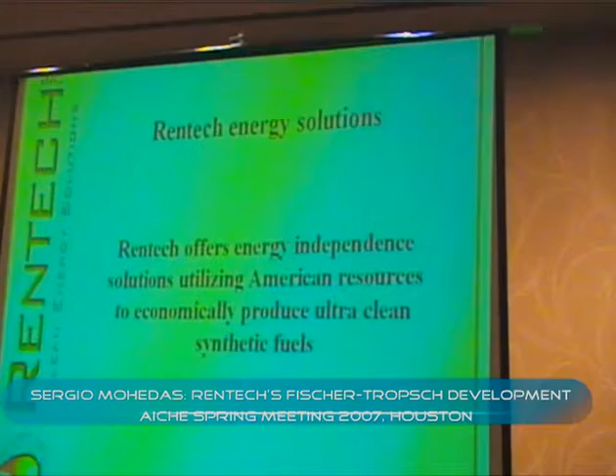Let's start talking about what is the Rentech role in this current energy situation. With sustained high oil prices and somewhat unstable supply, people are rapidly looking at different feedstocks, especially those that are widely available. Coal is one of them here in North America especially. So Rentech's business model is focused on converting coal into liquid fuels, and we will be working with other carbon-bearing material in the near future, like biomass as well. But right now we are focused on coal.

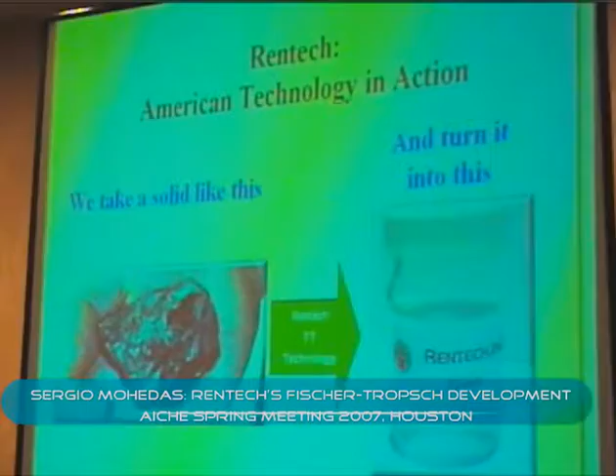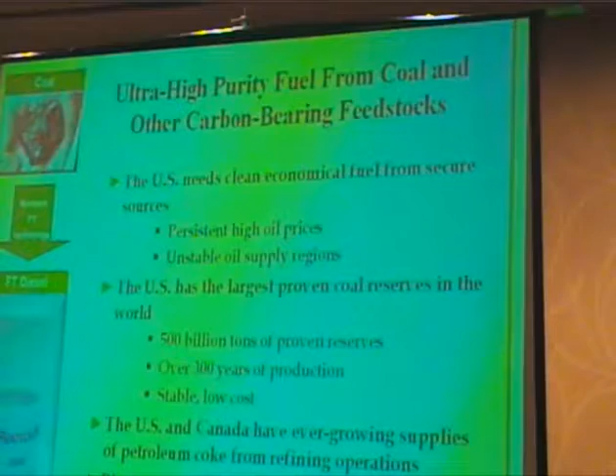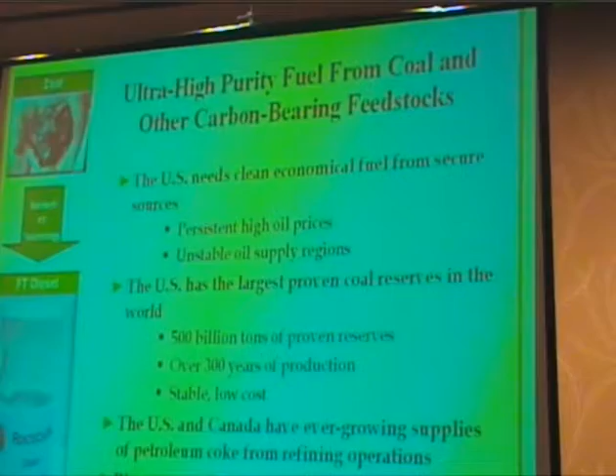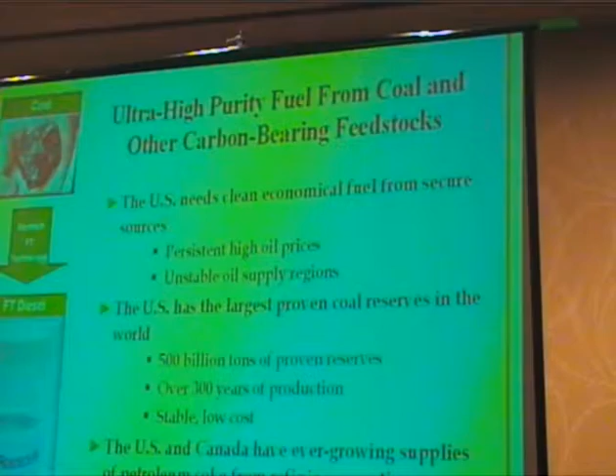Basically, it's taking an ugly rock like that and converting it into a pretty liquid like the one in the picture. It sounds simple, but it has some tricks, especially if you want to be economically competitive. The need for fuels is obvious, and basically the oil price is driving research on different feedstocks that are more available and cheaper than oil. That's why coal is one of them, especially in North America. We have one of the largest reserves of coal in the world - a few hundred years of production can be sustained with our reserves. So it makes sense to try to use it.

Biomass could be another feedstock that can be converted into liquid fuels, and we will be looking at that too.

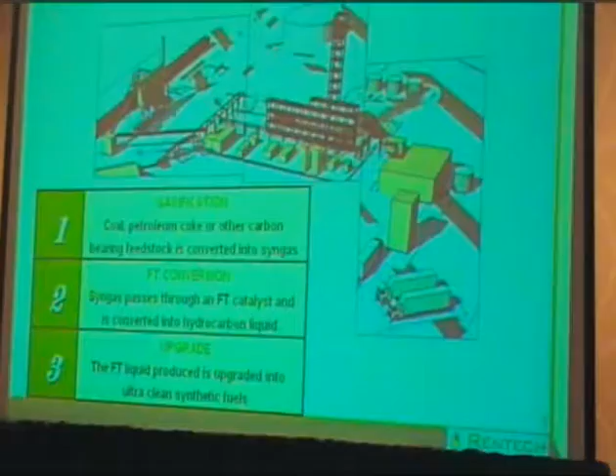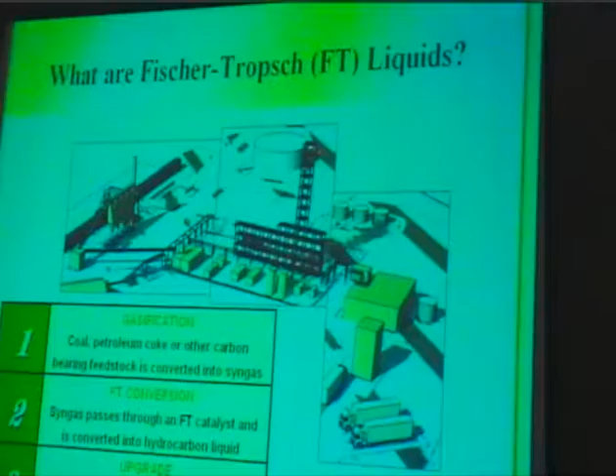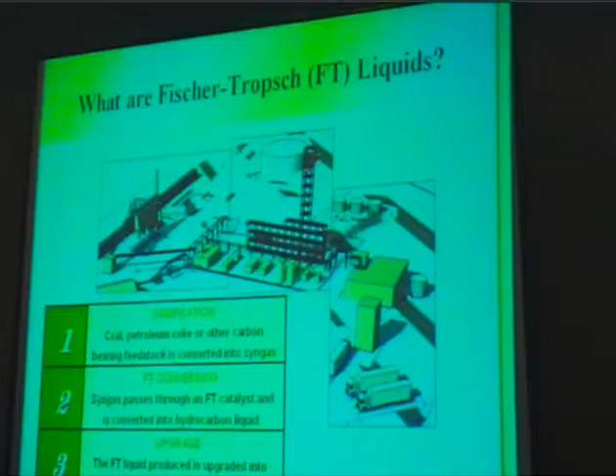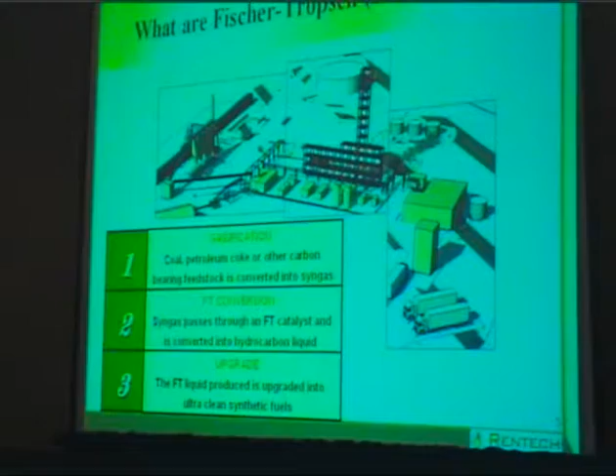Right now, not only coal, but there are other feedstocks, like byproducts from the petroleum industry, such as petroleum coke, that can also be converted into liquid fuels through gasification. Basically, you gasify carbon-containing feedstock. The main products of gasification are carbon monoxide and hydrogen, and then you subject this syngas, or synthesis gas, to a Fischer Tropsch reaction, which converts the syngas into an array of hydrocarbons from carbon 1 to carbon 100 or 200 long chain. After that, you need to upgrade these hydrocarbon products using typical hydroprocessing reactions like hydrotreating, hydrocracking, and hydroisomerization to convert them into more useful products, mainly diesel, jet fuel, and naphtha.

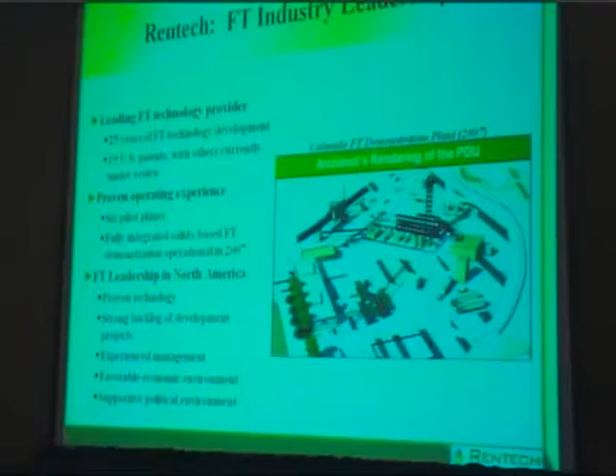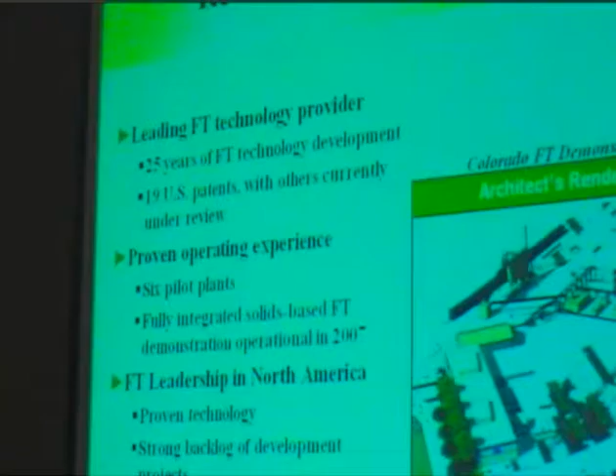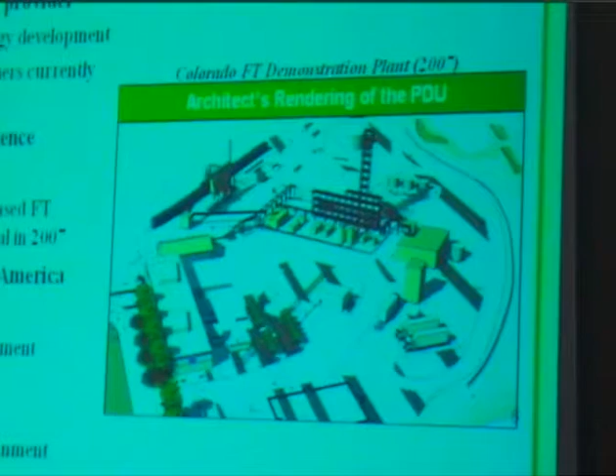Rentech has been around for 25 years and more. It has about 22 patents right now - 19 of them concerning Fischer Tropsch technology, and we are working on quite a few more. It has operated several different pilot plants at different sizes and different types of reactors, from small batch reactors to large bubble column reactors. We believe we have leadership in North America in coal to liquids and Fischer Tropsch as well.

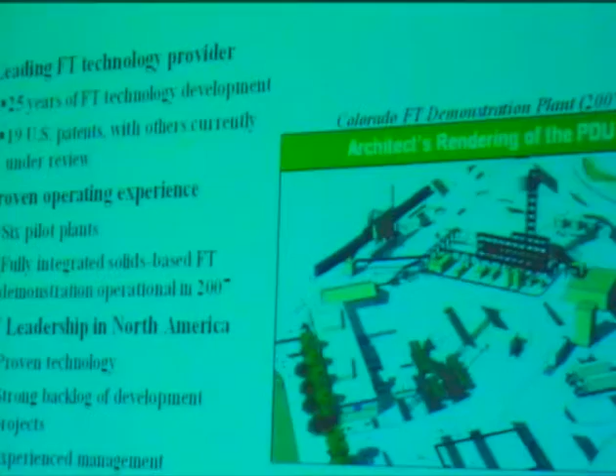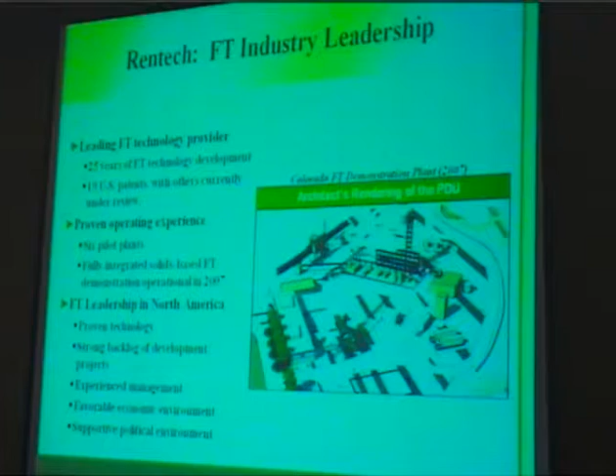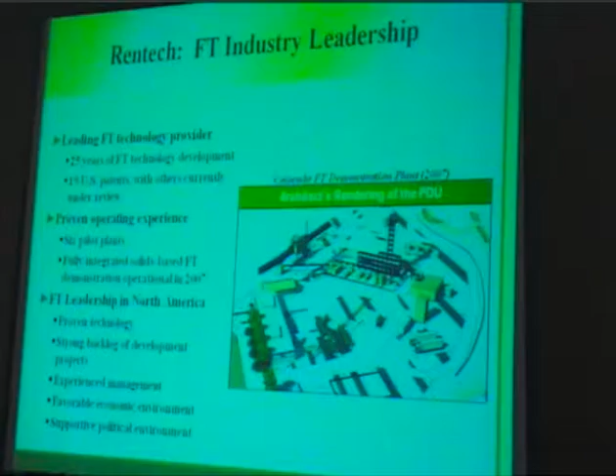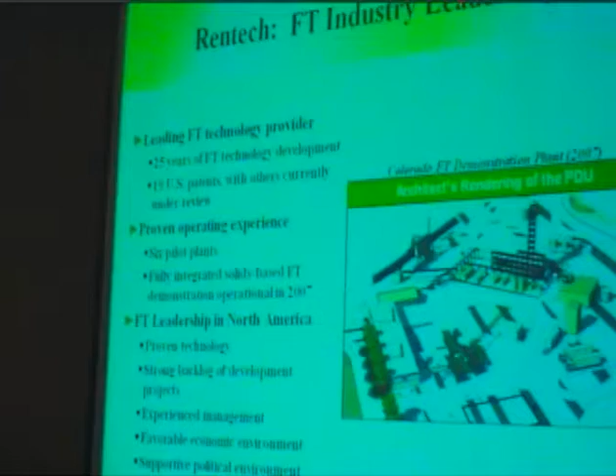A couple of years ago, the company underwent a management change, and mainly the company has seen an infusion of investment that is needed to commercialize any technology that is at lab scale. The first product of this investment is the product demonstration unit that we are building in Commerce City, Colorado. This is a scale up from a small pilot plant that we have in Denver. It's called PDU, Product Demonstration Unit, and it's an integrated demonstration plant all the way from coal to diesel and jet fuel.

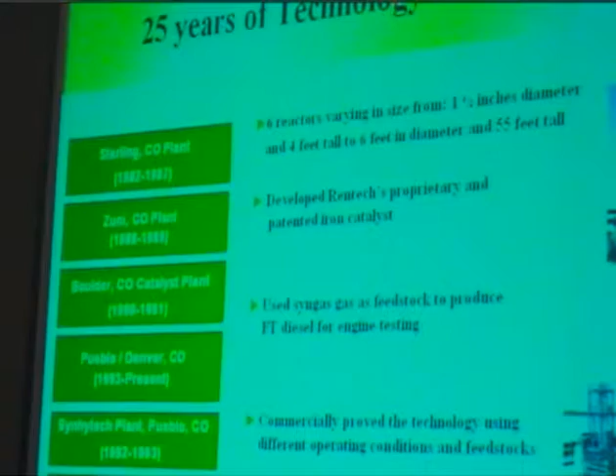Rentech has operated, like I said, several different plants throughout the years, different sizes, and has worked and invested quite a bit of effort developing an iron-based catalyst that Belva is going to tell you about in the next presentation. Right now we are focusing our efforts on the demonstration plant in Commerce City. It's a 10 to 12 barrels per day plant, and it has a gasification section, gas cleanup, and the Fischer Tropsch and product hydrating area.

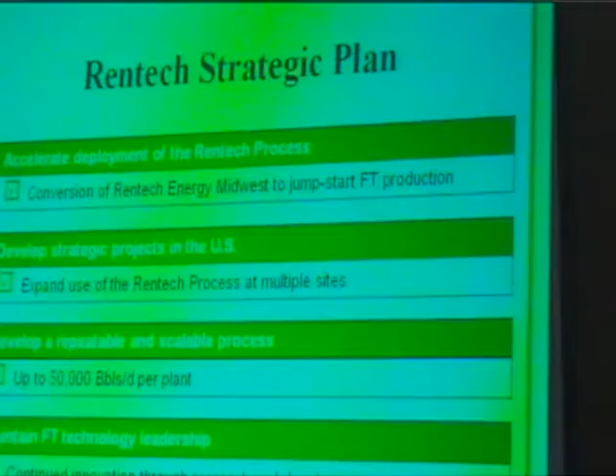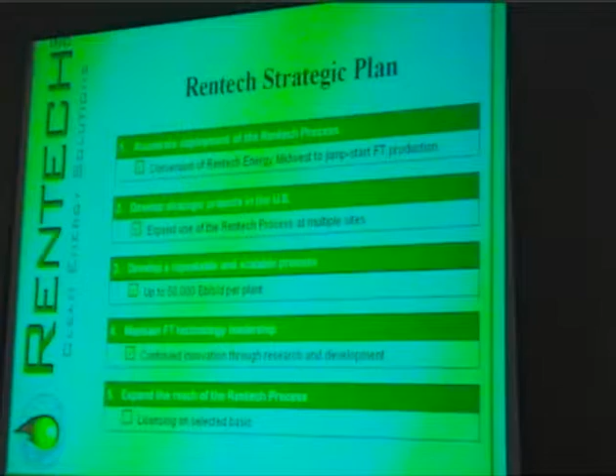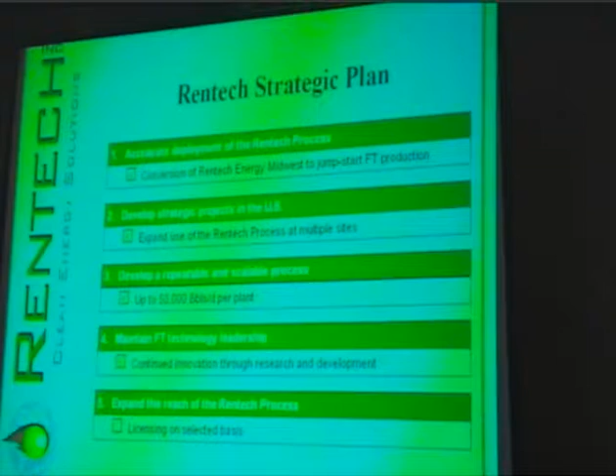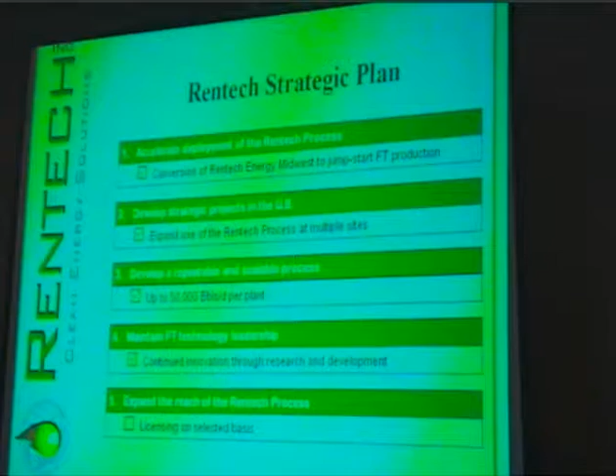This is basically the plan for commercializing our technology. The intention is to accelerate the deployment of our technology, and that's why we're building this product development unit. There are several strategic projects with several partners and potential licensees going on right now. We are working on feasibility and fit studies for different size plants, anywhere from 2,000 barrels a day to 50,000 barrels a day. The idea is to have a design appropriate to be scalable and repeatable.

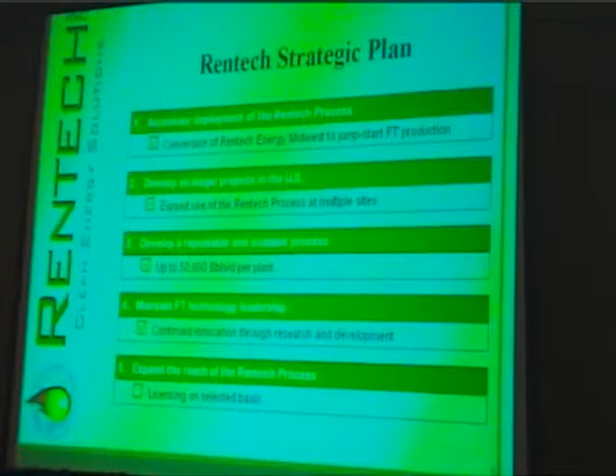One of the goals of Rentech is to maintain leadership in Fischer Tropsch technology in North America, and we will continue the innovation and research and development for better catalysts and better processes. The idea is also to expand the reach of our process through partnership and licensing.

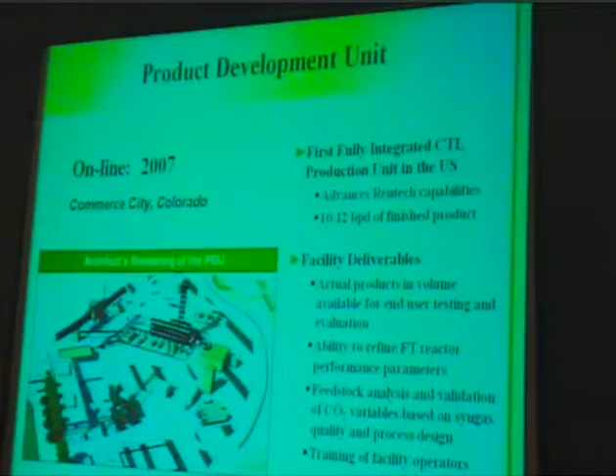That's a scheme of our product development unit. The unit will be mechanically completed by August, September this year, and it will be operational hopefully in the last quarter of this year.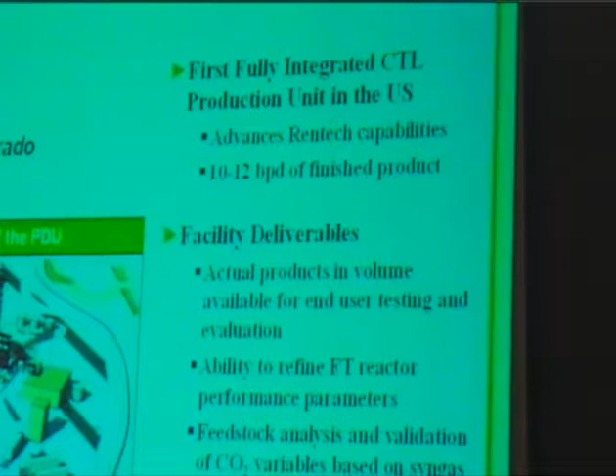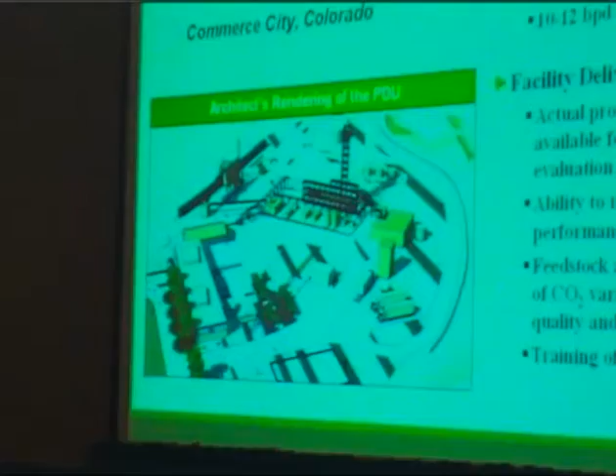We are building this plant to completely integrate the process, and it's going to demonstrate our technology. One of the main reasons to operate a plant like this is to obtain the information to scale up the Fischer Tropsch reactors process mainly, but also to assess how the other parts of the plant integrate with the Fischer Tropsch section.

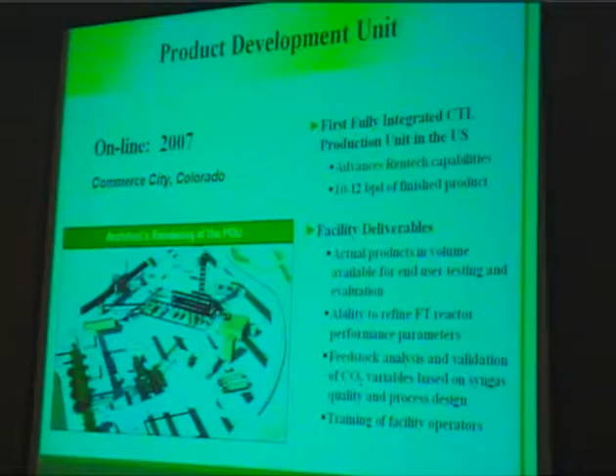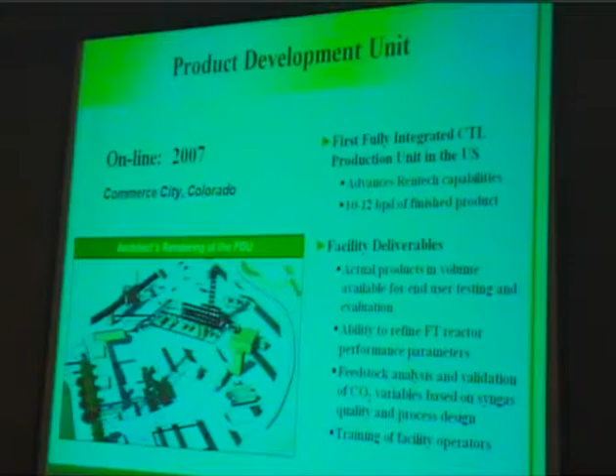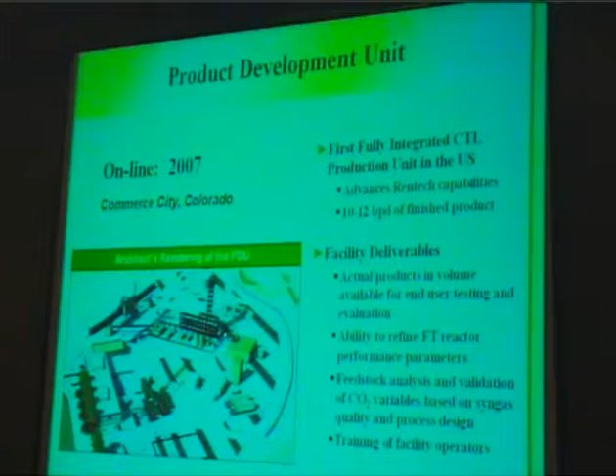That is the coal gasification, the gas cleanup. There's a quite complicated gas cleanup area because coal is not the cleanest feedstock that you can use to make syngas, so it's quite involved, that cleanup section. And also we need to make sure that the products that the Fischer Tropsch process makes are ultimately converted to the final product that you will sell in the market, which are the liquid fuels. So there's a whole section of product upgrading with several different reactors that do hydro-treat and hydro-process the product from Fischer Tropsch.

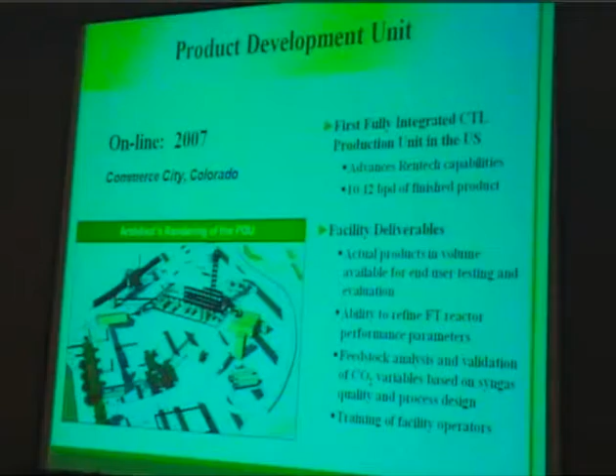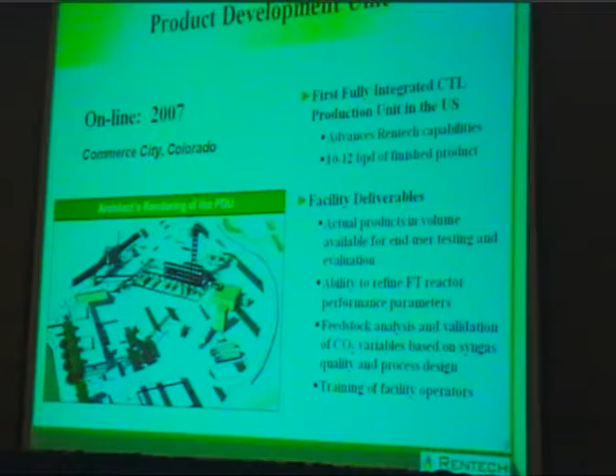The main focus for Rentech obviously is the Fischer Tropsch area, but we need to assess the integration with the other sections of the plant and learn how to operate this kind of plant, which will serve as ground training for the operations of the commercial sized plant.

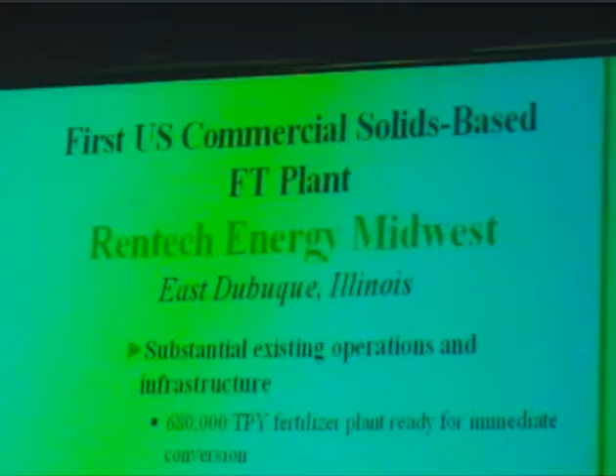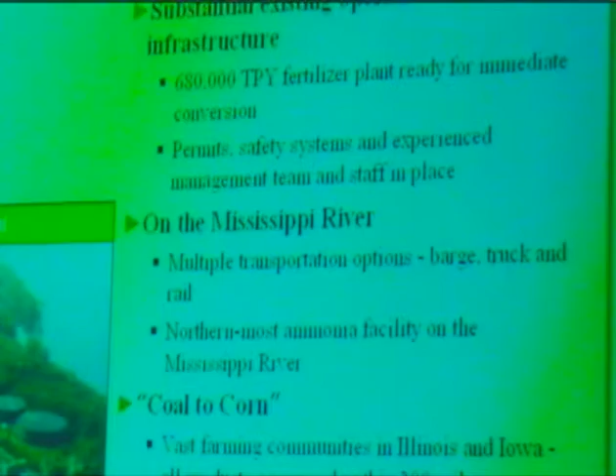One of the projects going on already is a conversion from natural gas to coal of a fertilizer plant that Rentech owns in East Dubuque, Illinois. Basically, we will turn this plant from what it was, a marginally profitable plant, to a very good return by changing natural gas to coal.

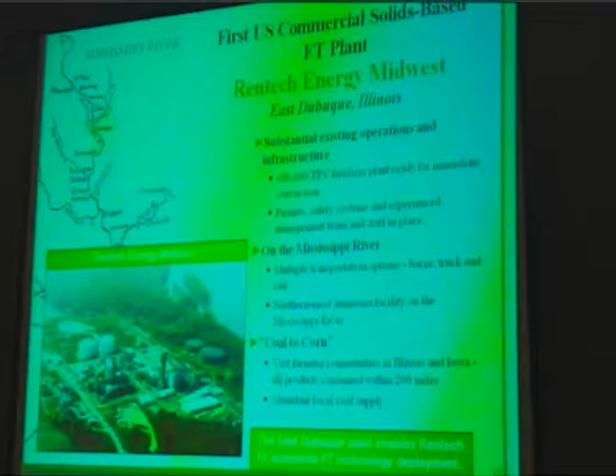And in this transformation, we're going to use part of the syngas produced with coal gasification to include in the process scheme a Fischer Tropsch reactor to produce liquid fuels.

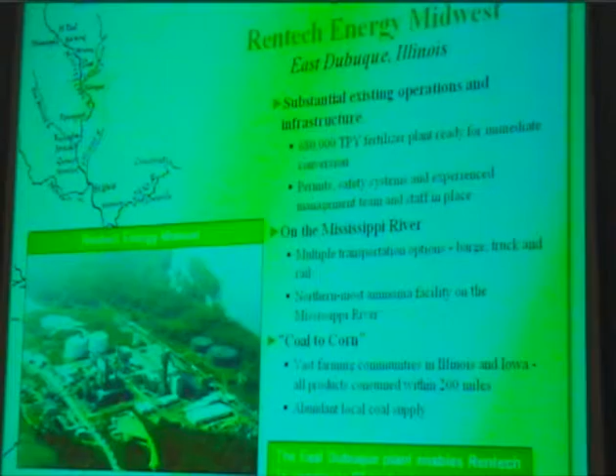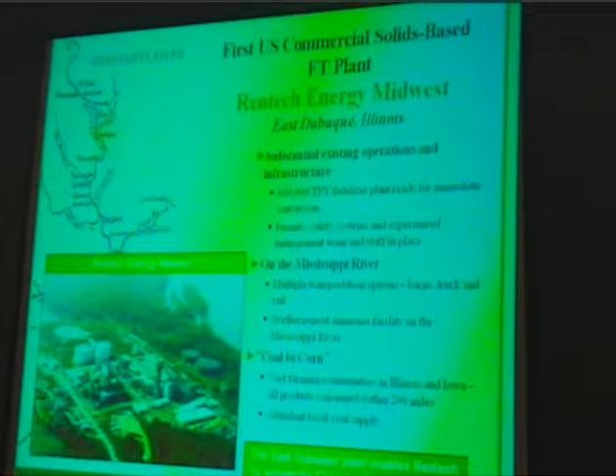The first phase for this plant is to basically convert the feedstock to coal and keep producing fertilizers. Second phase is to install a Fischer Tropsch and product upgrading reactors to make fuels, about 2,000 barrels a day, 1,500 to 2,000 barrels a day, which is a pretty good scale up from our PDU, which is 10 to 12 barrels a day. And it will allow us to build our learning curve in scaling up these plants.

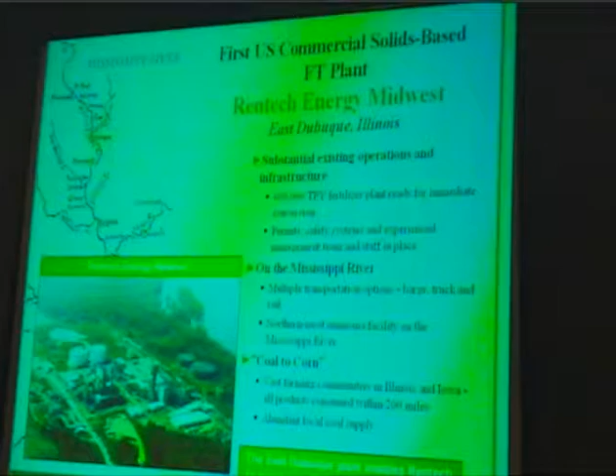There are several other projects that include polygeneration, meaning energy production and liquid fuels production.

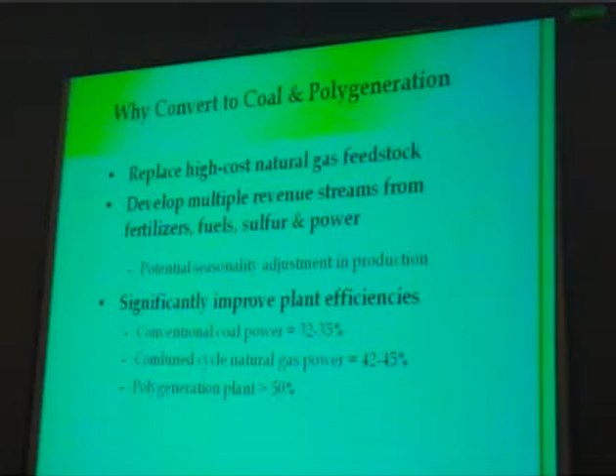The main drivers of this transformation in East Dubuque is to replace the feedstock with a lower cost feedstock. There are significant efficiencies that can be obtained with this transformation, and by introducing Fischer Tropsch process in a generation plant, you can gain quite a bit of efficiency in using the carbon and the hydrogen in the carbonaceous feedstock.

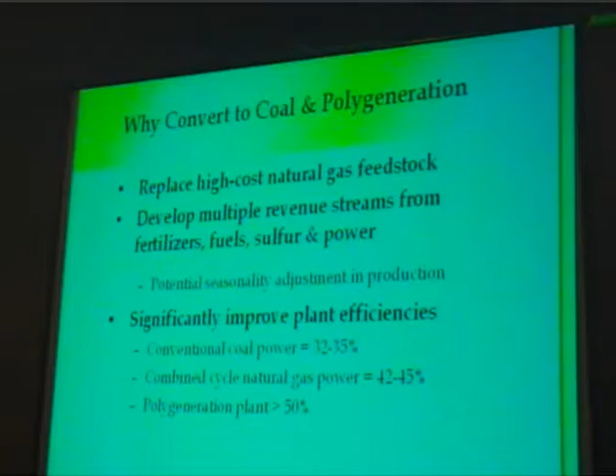Conventional coal power efficiency is usually 35%. In a combined cycle, you jump to 45%. If you have a polygeneration plant, it's usually more than 50%. That's the goal, making the small FT facility economic and attractive to the financial community by building and operating this relatively small capacity plant, 2,000 barrels a day.

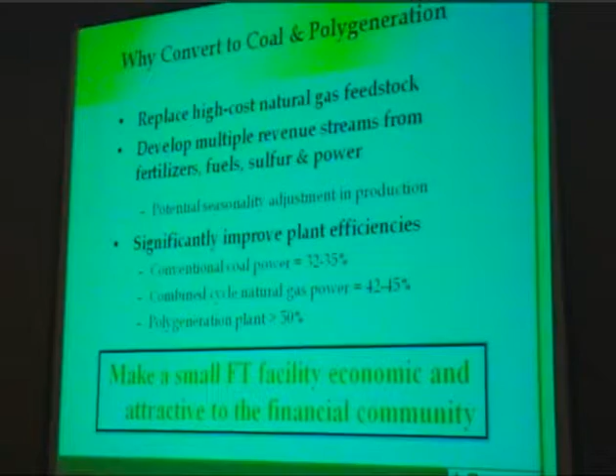It's another step in proving the technology, that is, proving that the technology is scalable.

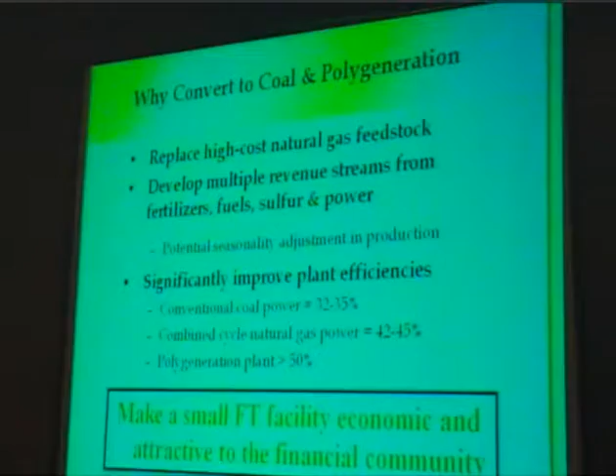This is the current process scheme, or block flow diagram, of our fertilizer plant using natural gas. And the plant right now needs to import power.

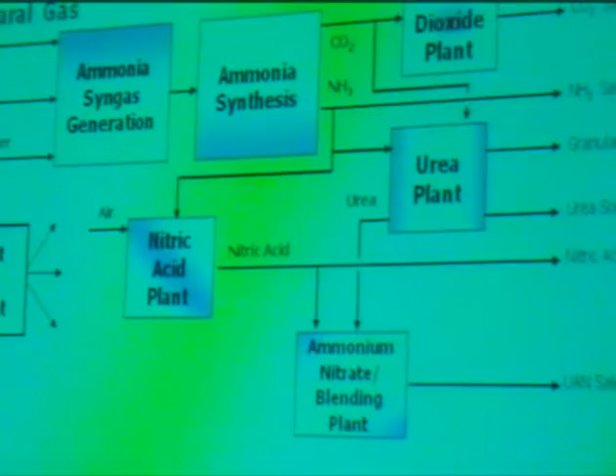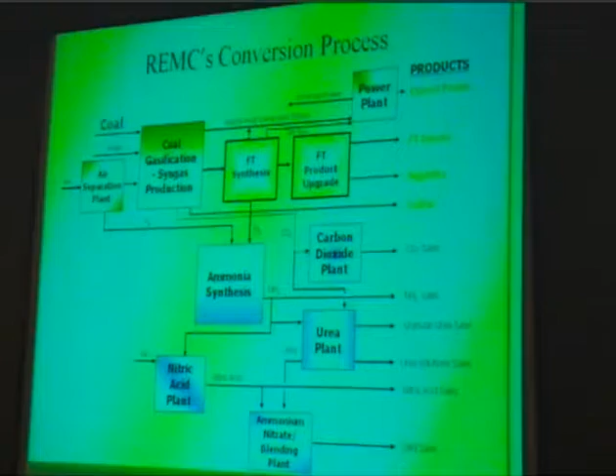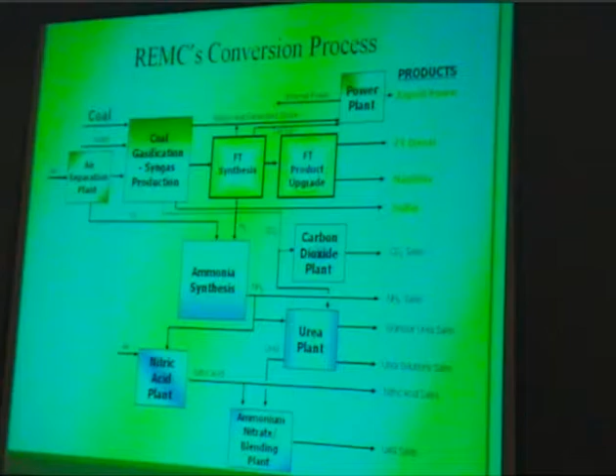By converting it to coal-based feedstock, we will be self-sufficient in power, and we can even export power and keep producing the same amount of fertilizers or fertilizer feedstock. And with the Fischer Tropsch process, using some of the syngas produced by the gasification, we will have other products like Fischer Tropsch diesel and naphtha. Some of the other products that can be produced, an important product for the market, is jet fuel also.

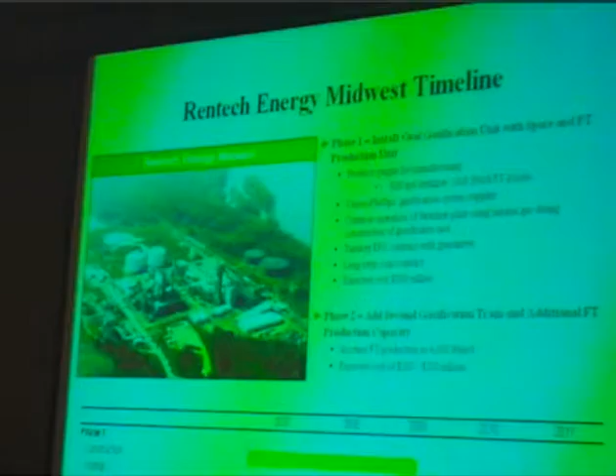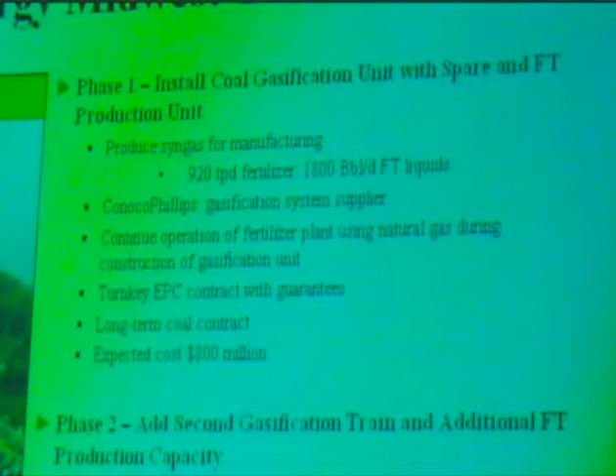This is the schedule for the transformation of this plant from natural gas to coal. The first phase has been started, and it will finish by the middle of 2009, and the startup of the gasification section and integration with the fertilizer plant will be late 2009. And it includes the 1,800 barrels a day Fischer Tropsch liquid plant.

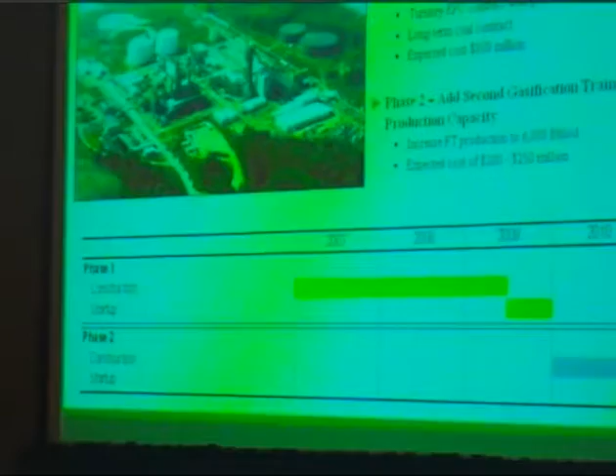The capacity for the fertilizer plant is 920 tons per day. We are planning to use a ConocoPhillips gasifier for this particular plant. Some of the other projects we are working on use different gasifiers as well.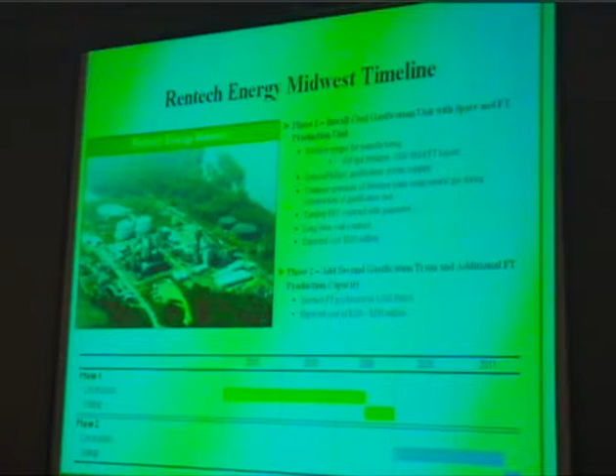The second phase includes expanding the Fischer Tropsch production plant to about 6,800 barrels per day. The investment for both phases, total, is near $1 billion.

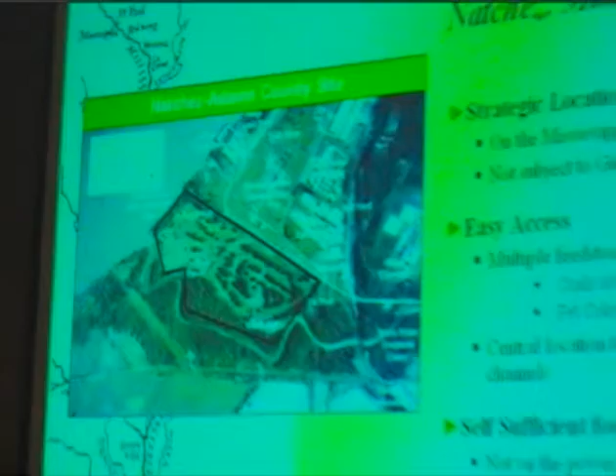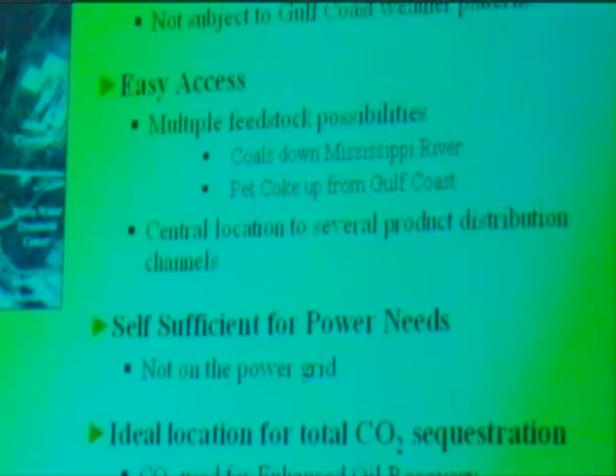Another proposed project is located in Natchez, Mississippi. Mainly, the location has been chosen because it's on the river, and you can have access to two different types of feedstocks through barges: coal from the Midwest or petcoke from the refineries in the Gulf area, which are good feedstocks for gasification. So it provides easy access to this feedstock.

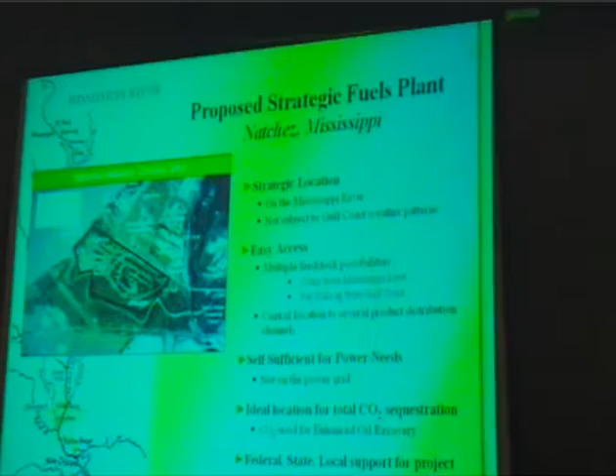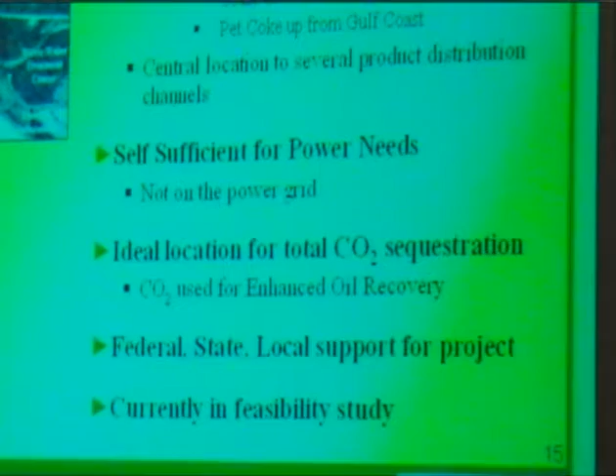It will be a self-sufficient plant in terms of power, and it's a good location for CO2 sequestration. There are several oil fields not very far away that can use CO2 to enhance oil production. The project is in the feasibility study right now, and it has quite a bit of support from the local government.

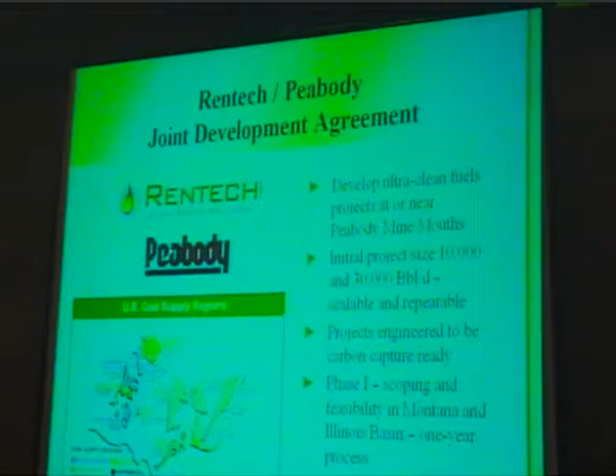Another project going on is with Peabody. It's a coal company, to develop basically mine mouth Fischer Tropsch plants. Different sizes depending on the location, anywhere from 10,000 to 30,000 barrels per day of liquid products.

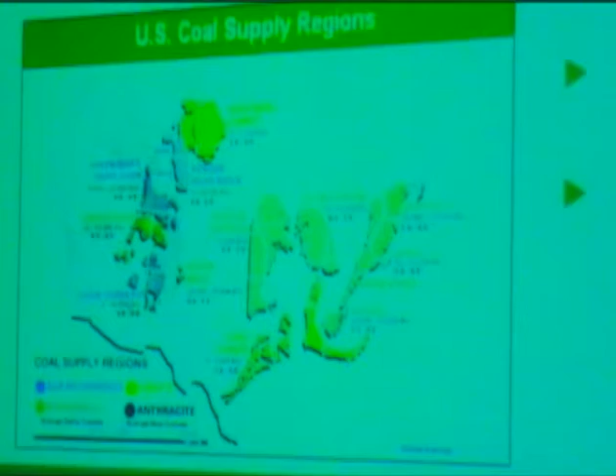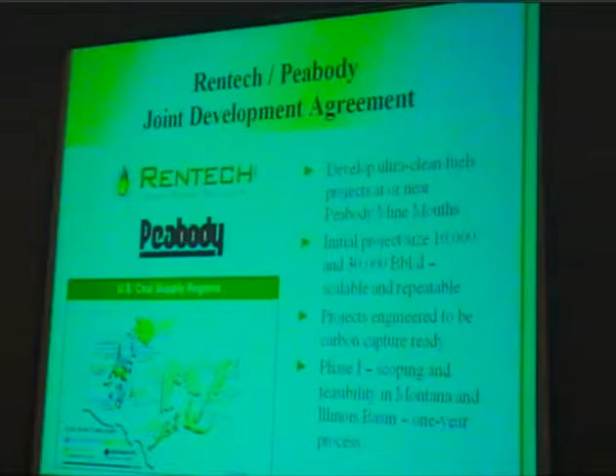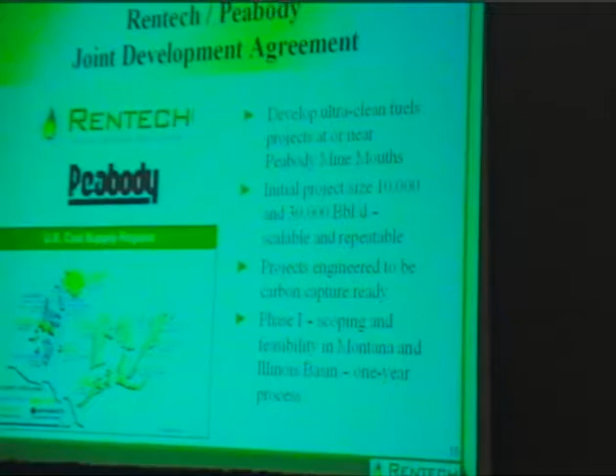The good part of the bad part of a CTL plant is that it generates CO2. The good part is that CO2 is pretty concentrated, and it's easy to get it concentrated in one spot, so the CO2 can be ready to be captured because it's easily concentrated in one spot in the plant.

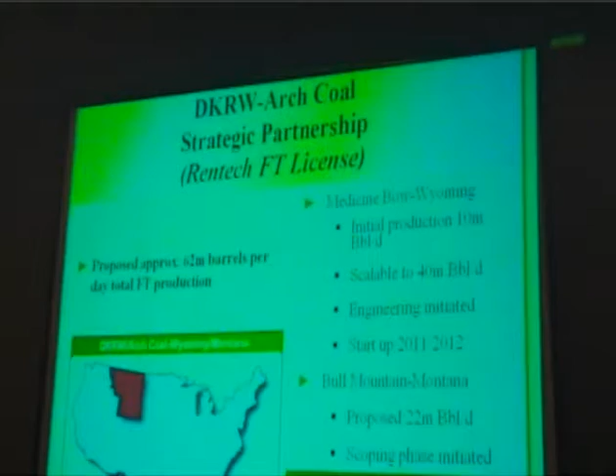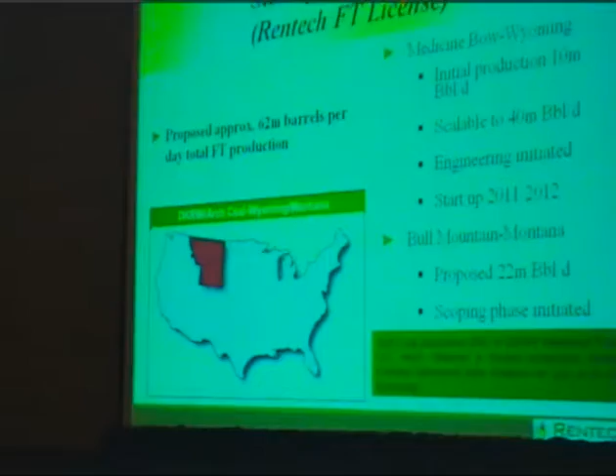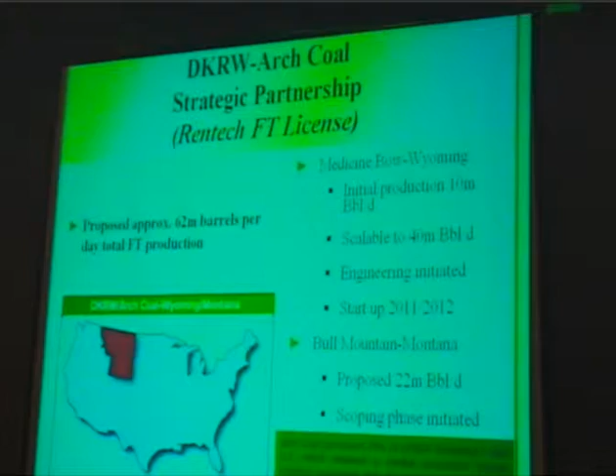Okay, it looks like that was the last one. So this is basically an overview of what Rentech is doing to commercialize the coal-to-liquids technology in North America. I'll try to answer some questions.

Questions? In your PDU, are you perchance putting a water gas shift reactor upstream of the Fischer Tropsch just for kicks? No, because our Fischer Tropsch technology is based on iron catalyst, and the iron catalyst is known for its ability to do water gas shift pretty well.

How do you discuss this—some say even with an iron catalyst, when you look at the entire economics of the process, it still makes sense to bring the hydrogen to carbon ratio up from 0.9 to, let's say, 1.6 or 1.7 before putting it into the iron-based Fischer Tropsch reactor?